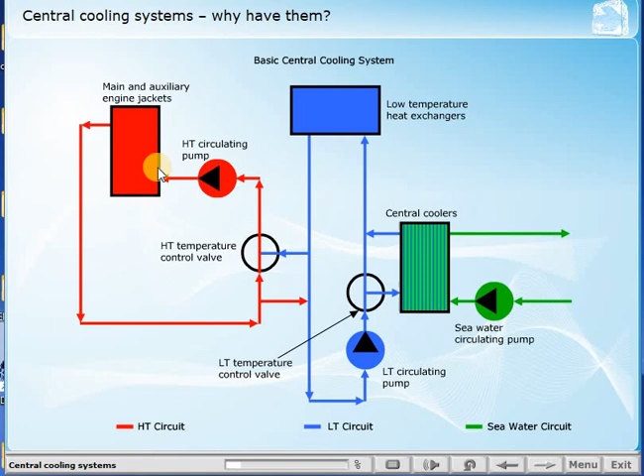A basic central cooling system has two interconnected freshwater circuits, one a high-temperature circuit and the other a low-temperature circuit, and a simple seawater circuit. The freshwater circuits are normally referred to as the HT and LT circuits, to denote high and low temperature respectively.

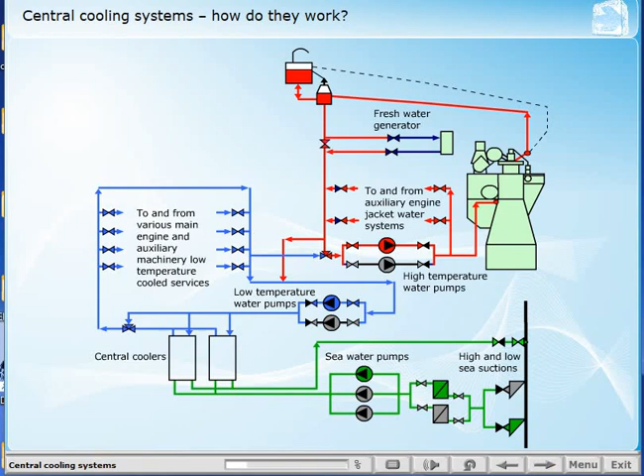The HT circuit serves the diesel engine jacket cooling water systems for the main and auxiliary engines. It can also be used for heating the fresh water generator. Typically, the system operates to give an outlet temperature from the engine of between 75 and 85 degrees Celsius.

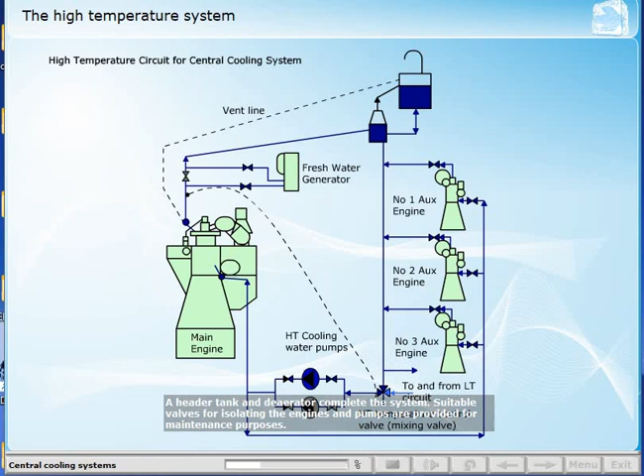All cooling requirements other than the main and auxiliary engine jackets are met by the LT circuit. This includes cooling for the main and auxiliary engine lubricating oil and charge air. Other machinery served by the LT system includes air compressors and refrigeration and air conditioning compressors and condensers. Typically, the LT system operates with a temperature of about 37 degrees Celsius.

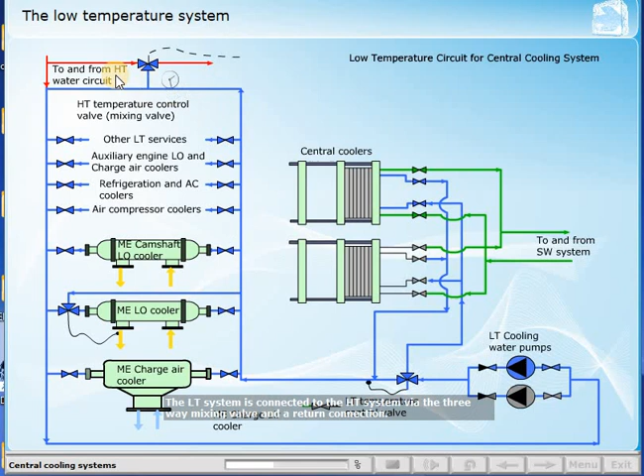Temperature control of the HT system is achieved by a three-way valve used as a mixing valve. The sensor for controlling this valve is usually positioned at the main engine jacket water outlet or the return line to the circulating pumps. Constant engine outlet temperature is achieved by mixing water from the LT circuit into the HT circuit via this three-way valve.

As the HT water temperature rises at the engine outlet due to increased engine power, the sensor detects the rise and sends a signal to the controller. Here it is compared to the set point and a corrective signal is sent to the control valve, which moves to allow some of the LT water to mix with the HT water, so reducing the temperature. There may be additional individual temperature control for the auxiliary engines using thermostatically controlled valves.

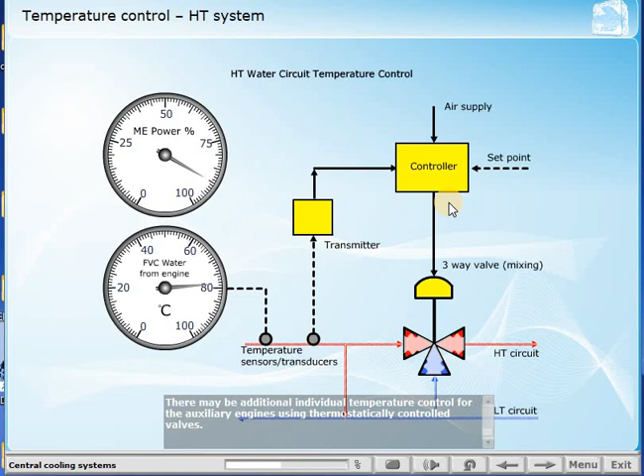Temperature control of the LT circuit is achieved by a three-way valve used to control the flow through the central coolers in a bypass arrangement. The sensor for the valve is positioned downstream from the point at which the return from the central coolers re-enters the LT circuit.

As the temperature of the system starts to rise due to increased thermal load, the sensor detects the rise and sends a signal to the controller. Here it is compared to the set point, and a corrective signal is sent to the control valve, which moves to allow some of the LT water to pass to the coolers, so reducing the temperature. Any further increase in thermal load on the system will cause the valve to divert more flow to the coolers.

In some systems there are additional three-way valves to control temperatures of the individual services by bypassing the secondary fluids at the relevant heat exchangers. Minimum temperature for the LT circuit may be achieved by using split-range control to control a heating unit in the system.

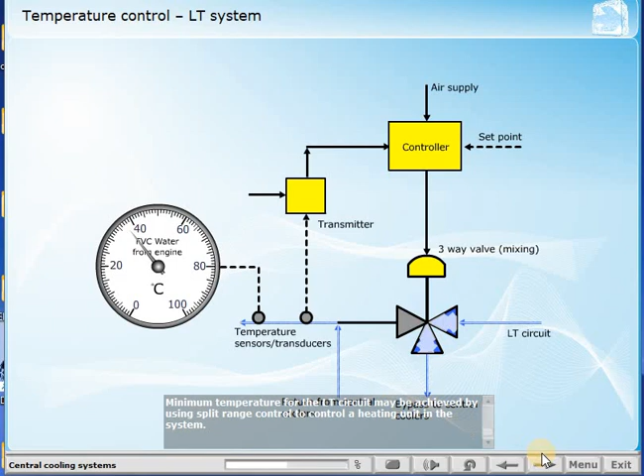The seawater circuit for a central cooling system is very simple. It usually consists of two seawater suction strainers, two or more circulating pumps, and two heat exchangers, the central coolers. These heat exchangers are usually of the plate type. The material used for the pipework is generally high-quality copper-based alloy, although some systems use stainless steel. These materials reduce maintenance requirements as they are resistant to corrosion, and as there is so little pipework in the system, the cost is moderate.

The plates for the heat exchanger are also made from high-quality material, which is resistant to corrosion. Stainless steel or titanium is often chosen, since the high strength allows very thin plates to be used, which improves heat transfer.

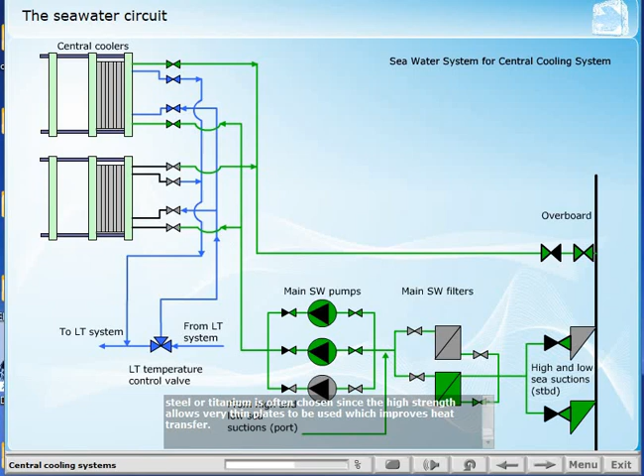The central cooling system can be adapted to provide cooling or heating for most of the machinery on board. The LT system can be used to provide the secondary fluid for many of the cooling requirements, such as air compressor, heat exchangers, and oil coolers. The HT system can be used as a source of heating. We have already seen that it can be used as the heat source for the freshwater generator. It can also be used to heat domestic water and to preheat machinery such as the main and auxiliary diesel engines.

The seawater circuit can be used to provide preheated feed for the freshwater generator, and also the cooling requirements for any systems requiring direct seawater cooling to achieve lower temperatures than can be achieved by the LT water. By doing this, the number of subsystems can be reduced and the overall plant simplified.

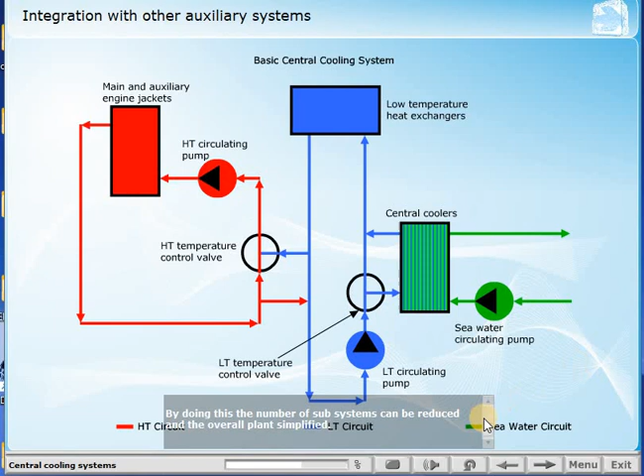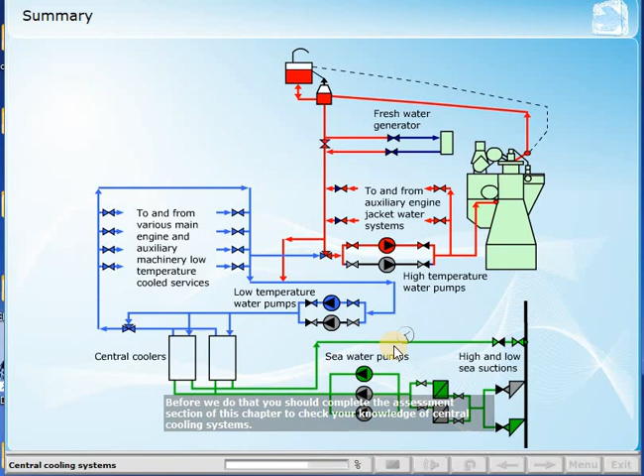In this section we have looked at the arrangement of a central cooling system. You should now understand the reasons for having such a system and be aware of the subsystems that make up the main system. You should also have an understanding of how the system temperatures are controlled. In the next chapter, we will look at the maintenance requirements of cooling water systems, and in particular, how we can treat the systems to minimize this requirement. Before we do that, you should complete the assessment section of this chapter to check your knowledge of central cooling systems.